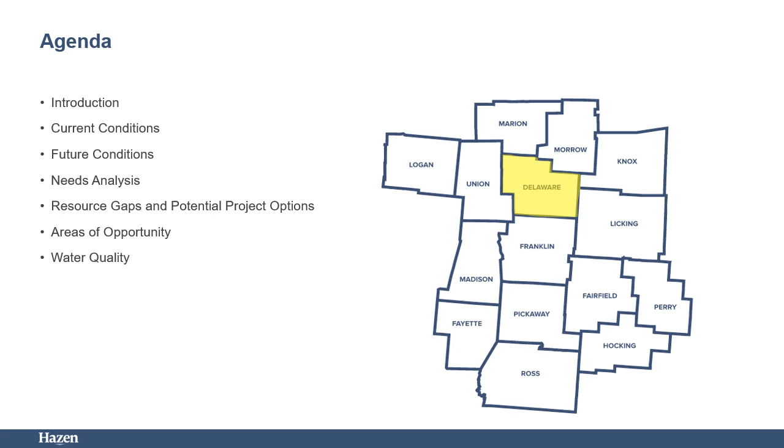And finally, water quality. We will close with a discussion of the projected changes to water quality throughout the planning horizon. Projected water quality impacts were developed based on projected changes to residential development, industrial development, and temperature and precipitation conditions. So let's begin with a high-level introduction to the study.

The Central Ohio Regional Water Study was completed for a 15-county area, as shown on the map. The overall goal was to quantify current and future water-related needs within the region and identify areas with water-related gaps and surpluses. The study evaluated water-related needs that span drinking water supply, drinking water treatment capacity, wastewater treatment capacity, receiving water capacity, and water quality for the years 2030, 2040, and 2050.

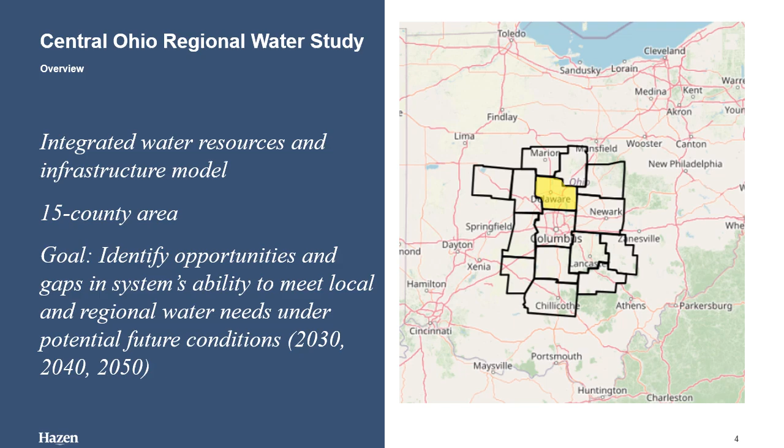Project objectives were identified for the Central Ohio Regional Water Study. The objectives include improve, maintain, and optimize resources while planning for growth. Results of the model were used to evaluate opportunities to secure safe and reliable water supply for public use, consider reuse water for non-potable needs, and identify areas of capacity limitations. Future solutions were required to maintain beneficial use of water required for recreation, wildlife, and economic growth.

Collaboration and regionalization. The project created a dashboard planning tool that will serve as a focal point for collaboration between utilities and state agencies, helping to ensure best use of both water and financial resources. Maximize funding impacts through sustainable infrastructure improvements. Using the analytic capabilities in the dashboard, state agencies can now and will in the future be able to help identify funding to build the infrastructure needed to meet the long-term needs for the region and identify future needs.

The project also provides information to the state agencies on how stormwater and surface waters will be impacted by growth and development. The project can be used to identify opportunities to help mitigate impacts of development on the environment.

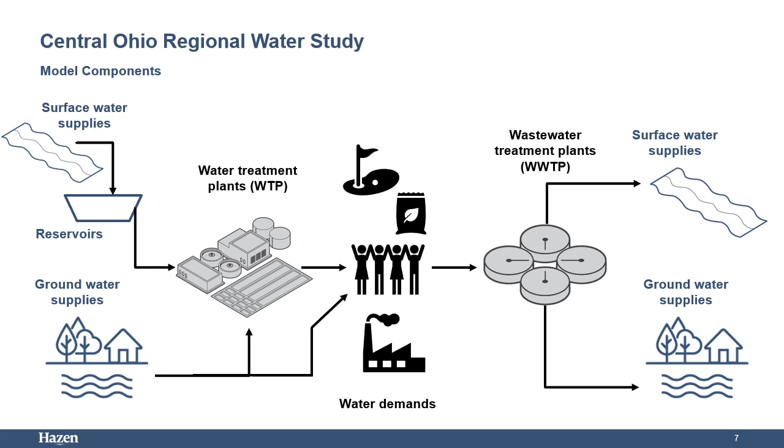Groundwater availability was estimated at the HUC 10 watershed level. To explain, HUC stands for Hydrologic Unit Code, and the 10 stands for the number of digits. The U.S. Geological Survey has delineated each of the watersheds in the country and assigned them a specific number based on their location, similar to a zip code.

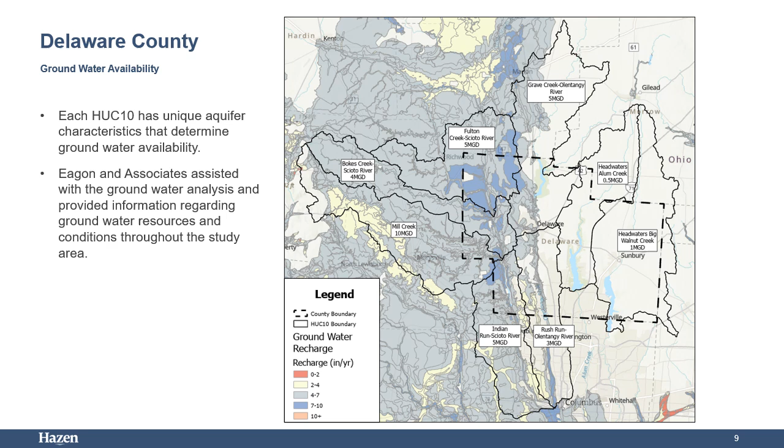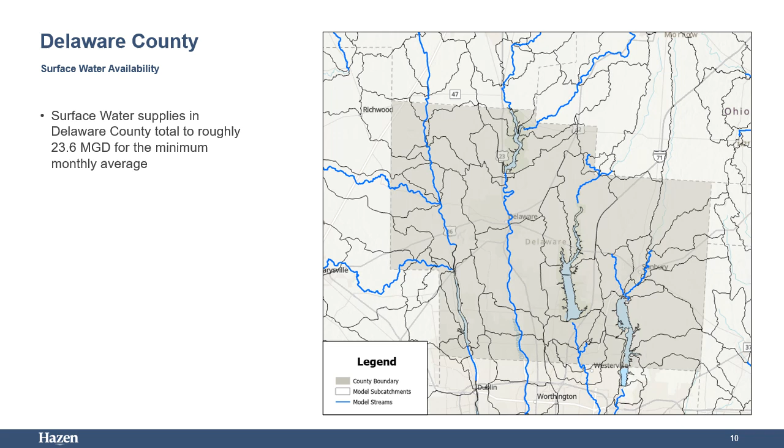Adding both the groundwater and surface water supplies together, it is estimated that Delaware County has roughly 57 million gallons per day of total available raw water supply. This supply availability is about 60% groundwater and 40% surface water. Supply availability at the sub-county level varies by location based on aquifer yields and surface water tributary area, as presented on the previous slides. The next focus for this resource evaluation was the existing and future demands that draw raw source water from the available water resources.

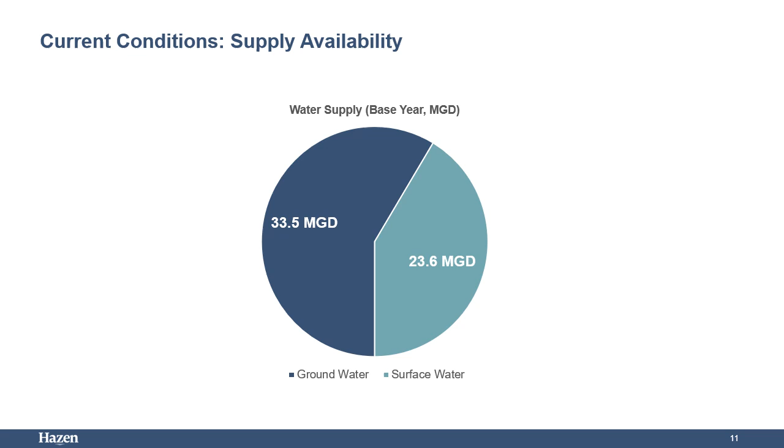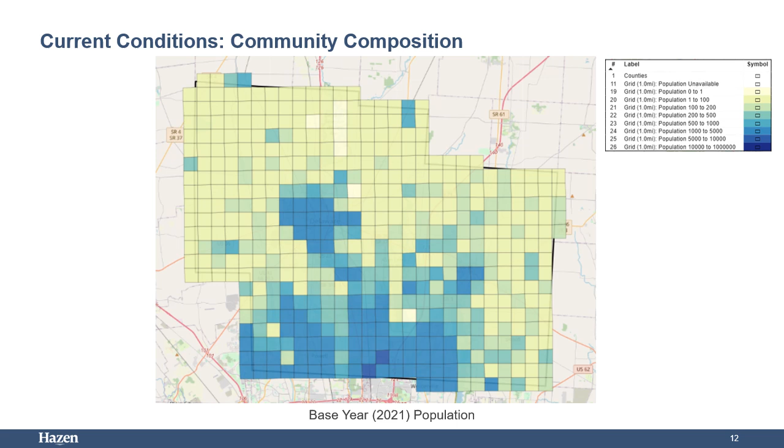A per capita water use was calculated for each service area. This was calculated by taking the water production data and dividing by the assumed population within a service area, which resulted in a per capita water use in gallons per person per day. This per capita water use includes all types of users within the service area, whether it is residential, commercial, or industrial.

It is important to note that in future conditions, no service area expansion was assumed, and the water per capita use for each utility was assumed to stay the same. This means that growth in projected population would also mean a proportional growth in commercial and industrial demand within the utility service area boundary. For future water demands, the per capita water use was multiplied by the assumed future population within a service area.

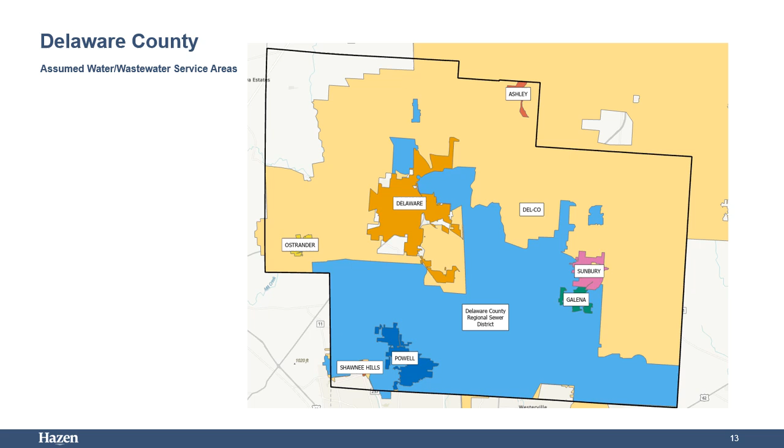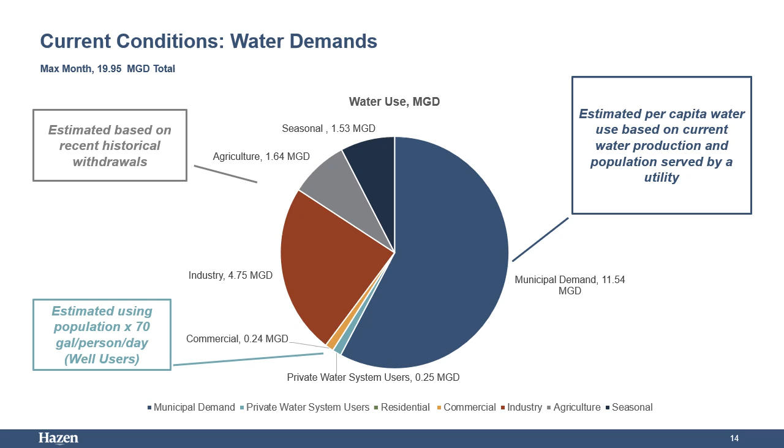The wastewater flow component in the county includes the used water from the service areas in addition to the inflow and infiltration component, or I&I, which was estimated and included in the wastewater flow. For the current condition, the maximum annual average wastewater flows are approximately 15.5 million gallons per day at the county level. The annual average wastewater flows were analyzed rather than the maximum month flows, as was done for water.

This is due to the wet weather impacts observed in the wastewater due to infiltration and inflow. During rain conditions, areas with combined sewer systems can see very high flow rates, while during dry times only the base flow is observed. High rainfall in a single month could skew the average. Therefore, an overall annual calculation is used to determine if a particular plant is nearing its permitted treatment capacity limit.

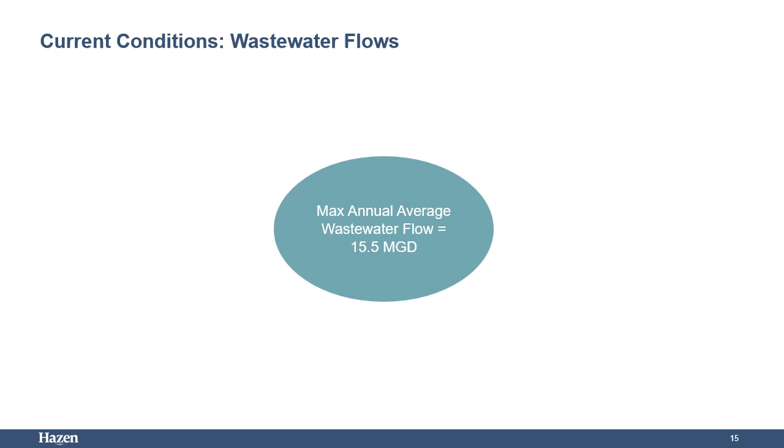The existing demands and flows can be compared to the existing infrastructure. In Delaware County, there are a number of water treatment plant facilities, and their total capacity is just over 53 million gallons per day. This includes the TES plant for Delco that is located in Knox County. Roughly 11% of that source water is pulled from groundwater, and 89% is pulled from surface water reservoirs, or the local streams and rivers. Remember that the total maximum month water demands are about 20 million gallons per day. So, in the current conditions, the county has sufficient capacity to provide treated water to meet demands.

From a wastewater treatment plant capacity standpoint, the county has just over 29 million gallons per day of permitted capacity at the existing facilities across the county. The current maximum annual average wastewater flow generated by the demand and infiltration and inflow is about 15.5 million gallons per day. Again, the existing county infrastructure is sufficient to meet the current wastewater flows.

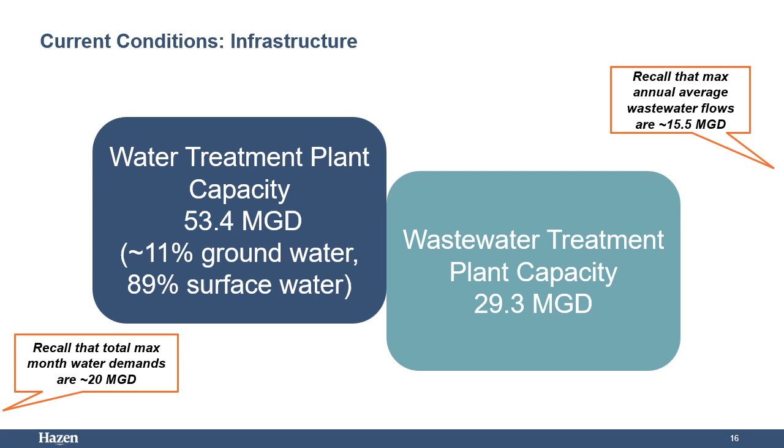With an understanding of the current conditions in the county, the next step was to expand the analysis and explore potential future conditions. This study evaluated conditions in 2030, 2040, and 2050. When analyzing future conditions, current data is projected from the present to the future in time. With that projection comes uncertainty, which is why analyzing multiple potential future scenarios can provide more resiliency and reduce the risk of failure. Scenario planning acknowledges there are several plausible future conditions that may occur and allows planning for several possible future conditions.

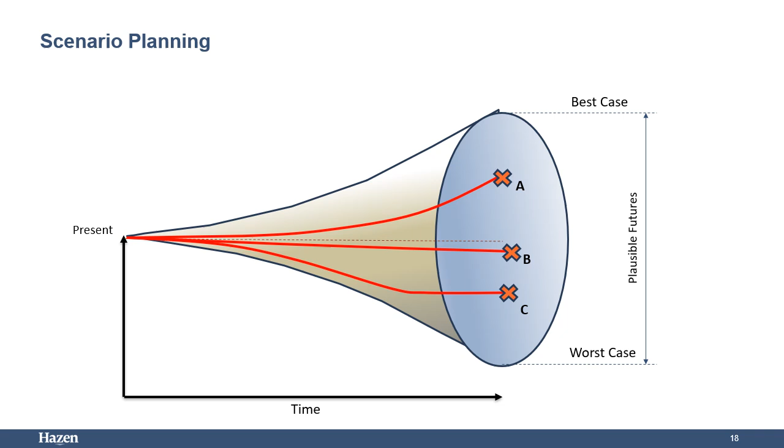4 model scenarios were developed to define the range of potential futures. Scenario conditions that were explored were 2 different precipitation and temperature changes and 2 different population estimates, totaling 4 different model scenarios. The different inputs of these scenarios will be explored further on the following slides.

2 population sources were used for the scenario modeling. The expected growth trend was informed by the Mid-Ohio Regional Planning Commission, or MORPC. The MORPC population projections were informed by local zoning and land use plans. The historical growth trend was informed by the Ohio Department of Development, or ODOD. The ODOD population projections are informed by historical birth, death, and migration trends.

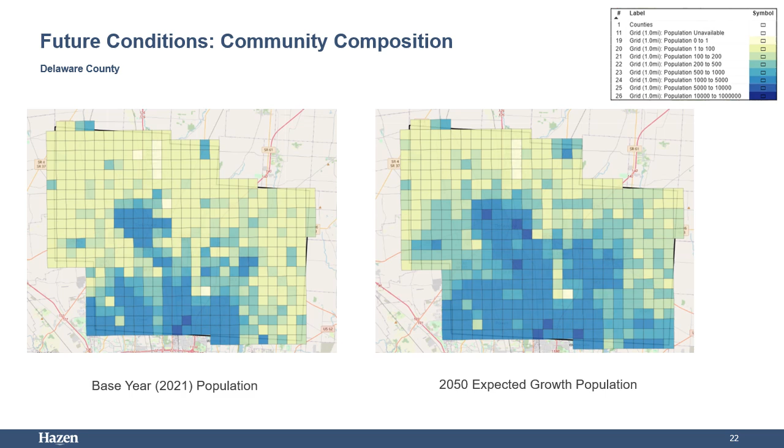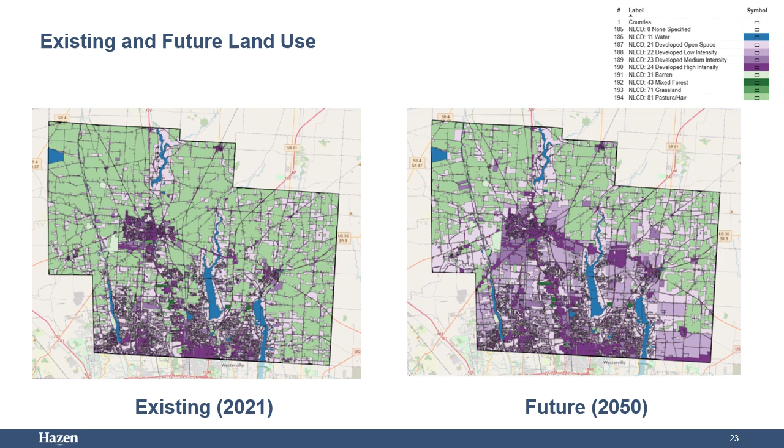Another element of the scenario modeling are the different temperature and precipitation scenarios projected. Historical precipitation and temperature data from 1983 through 2022 were used to estimate the surface water runoff and evaporation. For the future conditions, change factors were applied to the historical precipitation and temperature data to analyze the effects it may have on surface water availability. Temperature and precipitation changes were based on the global climate model data downscaled to the Central Ohio area. There are different change factors for each month and future planning year, 2030, 2040, and 2050.

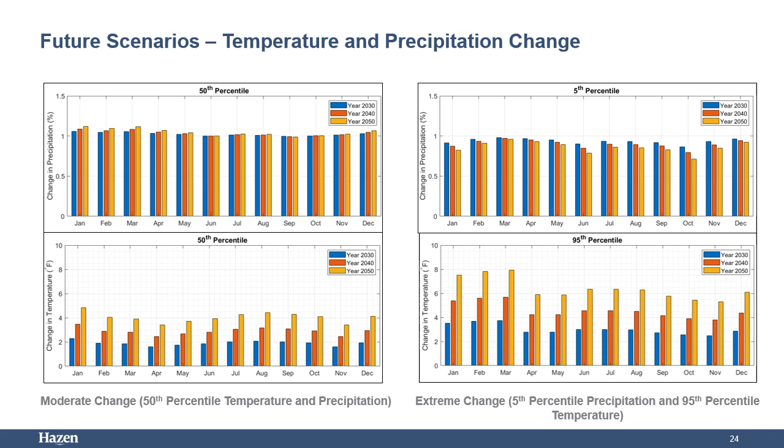The extreme change scenario that was modeled is the hot and dry scenario, which utilizes the 5th percentile change factor for precipitation and the 95th percentile change factor for temperature. The top right graph shows the 5th percentile change factors for precipitation, and the bottom right graph shows the 95th percentile change factors for temperature. A scenario with no future temperature and precipitation change factors was also evaluated. The two temperature and precipitation conditions affect the future raw water supply availability, as the two different population estimates affect the future water demands.

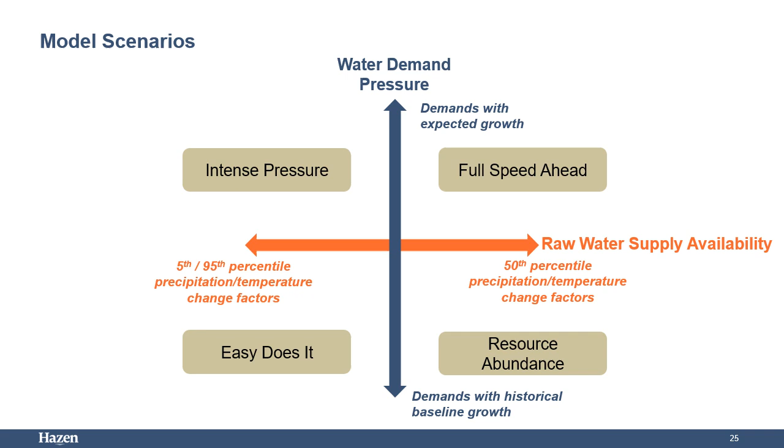These 4 scenarios allow for planning of what different supply and demand conditions may look like and how those conditions compare to the infrastructure needed. The different temperature and precipitation scenarios will impact water supply availability. In the model, the surface water supply availability was changed based on the temperature and precipitation change factors. However, groundwater availability values were unchanged based on these change factors.

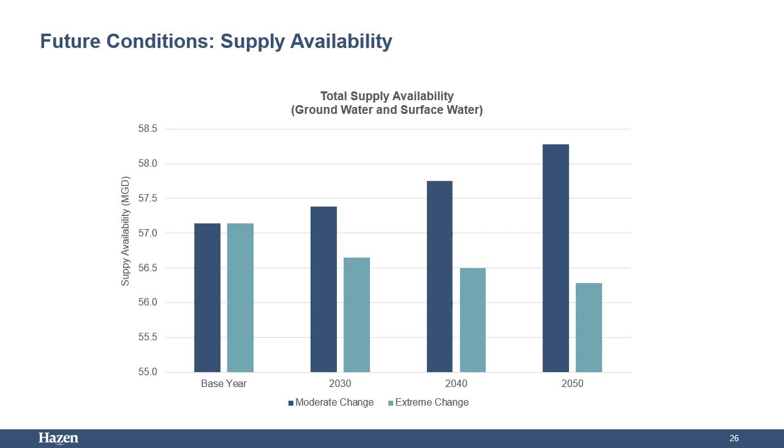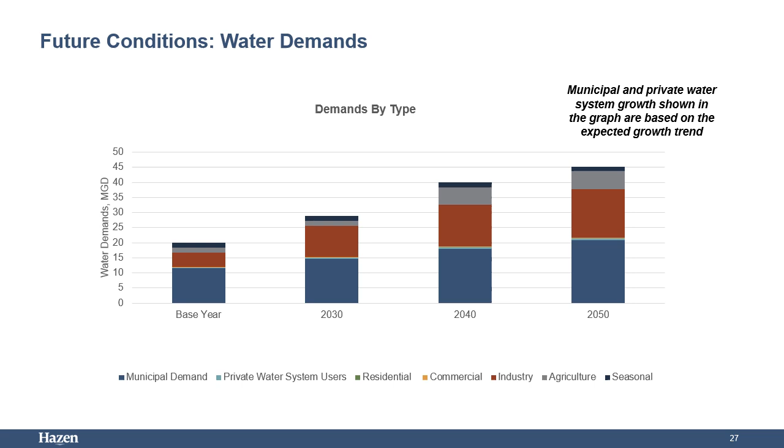The Ohio State University was consulted about assumed increases in future agricultural irrigation water demands. It is estimated that by 2040, agriculture fields will need at least 5 inches of irrigated water during the critical growing season, which occurs between July and September. Based upon this information, the team reviewed future land use to identify where agricultural fields are expected to be in 2040 and 2050, and calculated the water demand that would be needed for 5 inches of irrigation across those agricultural fields. These irrigation demands are present for the 2040 and 2050 condition and are assumed to use groundwater for source water.

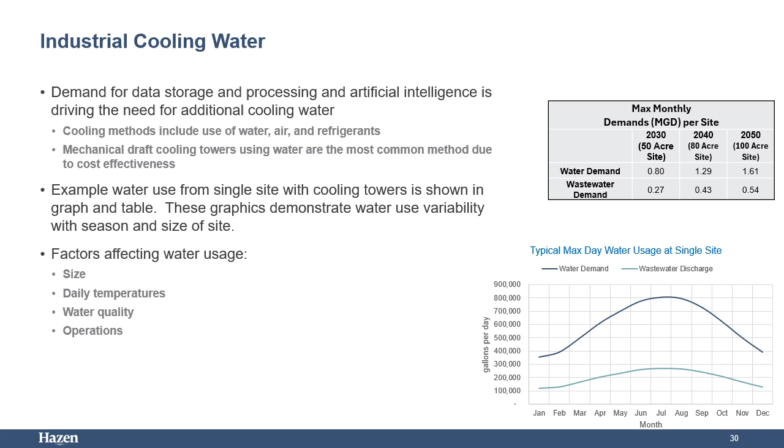Demands for industrial cooling water have increased in the area in recent years, including cooling water demands for data storage and processing centers. Industrial cooling demands have seasonal variability and need more water in the hotter months, as shown on the graph in the bottom right. These industrial sites are assumed to expand over time, increasing the water and wastewater demand for this sector. The table and graphic on the right show the assumed water use from a single site with cooling towers. Factors that affect water usage include size, daily temperatures, water quality, and operation.

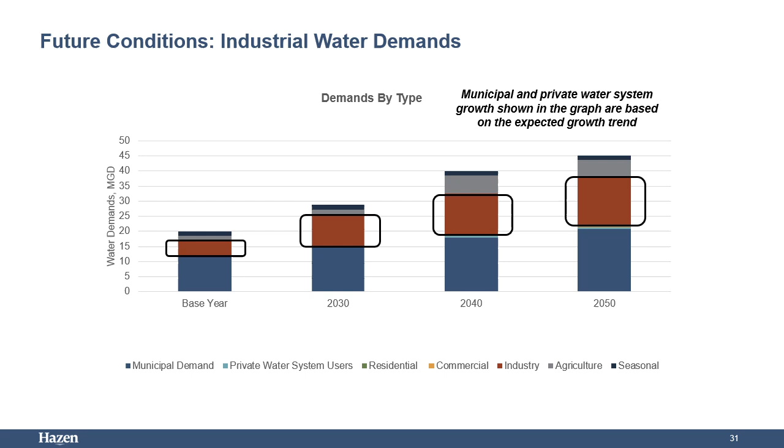Previously, the current water and wastewater capacities were explored at the county level. There are currently no future new or increased infrastructure capacities that were modeled for Delaware County. Therefore, the current water and wastewater capacities were assumed to remain constant through 2050. However, it is important to note that the City of Columbus is currently designing a new water plant to be constructed in Delaware County to primarily serve the Franklin County area. This water plant is not included in the totals and projections given on this slide.

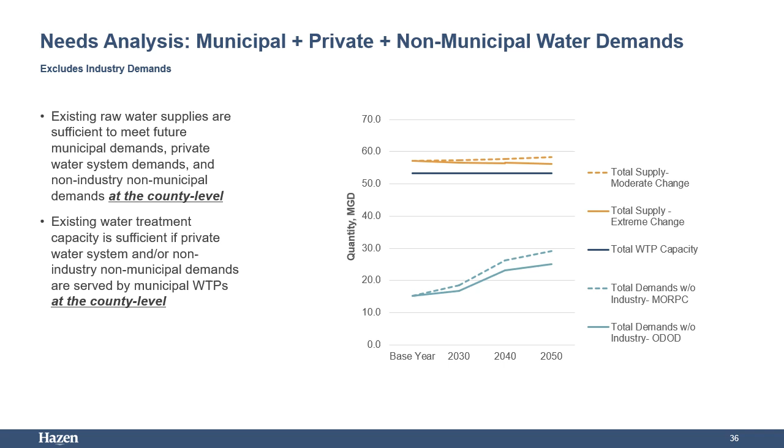Finally, when assumed industrial demands are added, the raw water supplies and water treatment capacity are still sufficient to meet the water demands at the county level, though demands start to approach the limit for water treatment plant capacity in 2050.

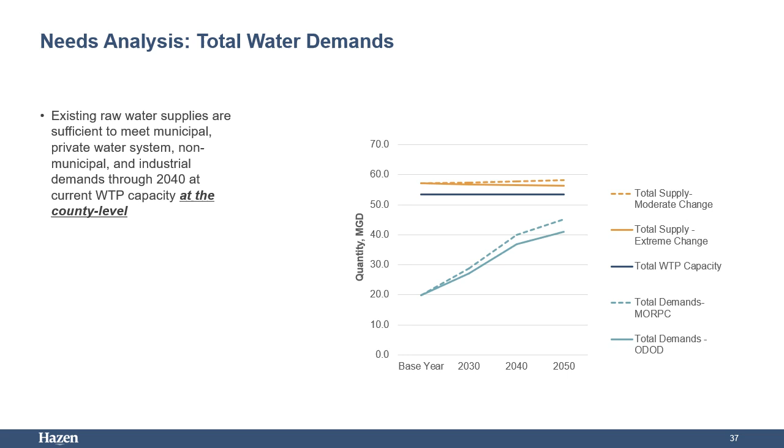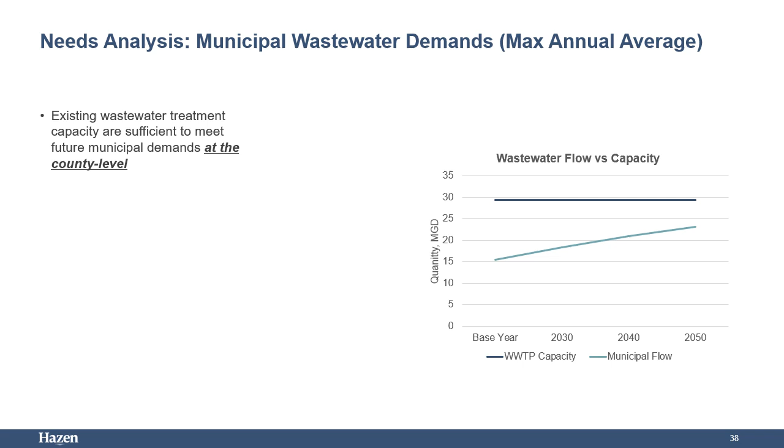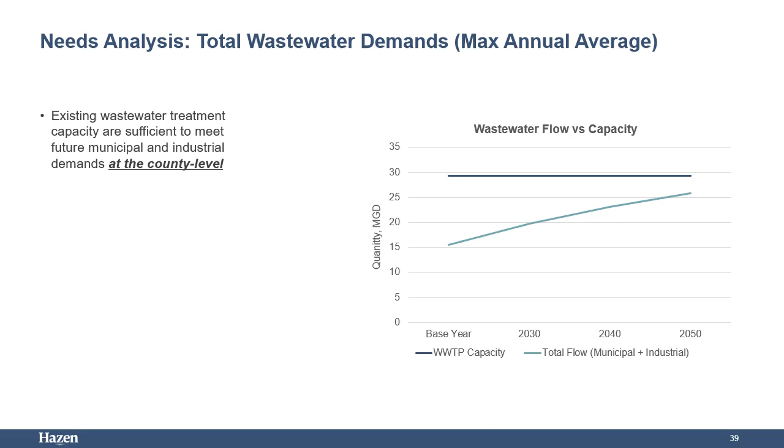The previous section evaluated supply and infrastructure availability relative to demands at the county level. This following section will address resource gaps and abundances when you consider where those supplies, infrastructure, and demands are projected to occur within the county.

For a surface water node, is any shortage observed? For a reservoir node, does the usable storage ever reach 20%? For a groundwater node, does the remaining groundwater amount ever reach 0? For a water treatment plant, is the maximum monthly average flow greater than 80% of the permitted capacity? For a wastewater treatment plant, is the maximum annual average flow greater than 100% of the permitted capacity?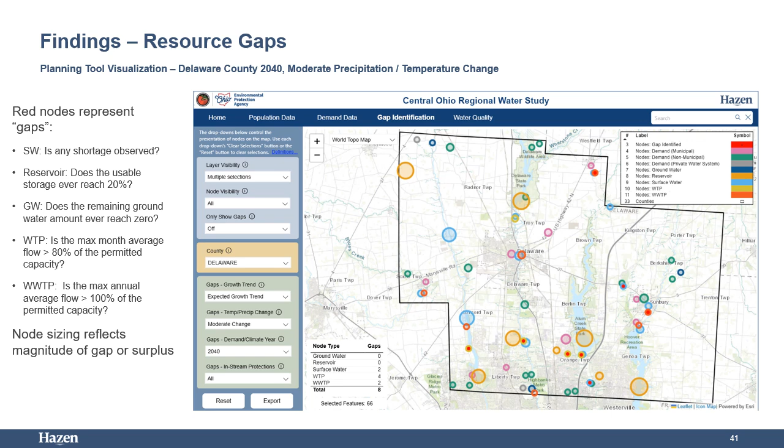This is resource gaps within the county for each scenario and model year. There are at most 12 gaps for any given year and scenario for the entire county. Most identified resource gaps in the county are infrastructure-based and not raw water supply-based. These gaps will be explored further on subsequent slides.

Findings in the subsequent slides reflect the expected growth and moderate temperature and precipitation change in 2040. The 2040 full speed ahead scenario was selected as the target planning scenario to allow stakeholders to assess the current and future project needs without extending too far into the future, while using reasonable temperature and precipitation projections.

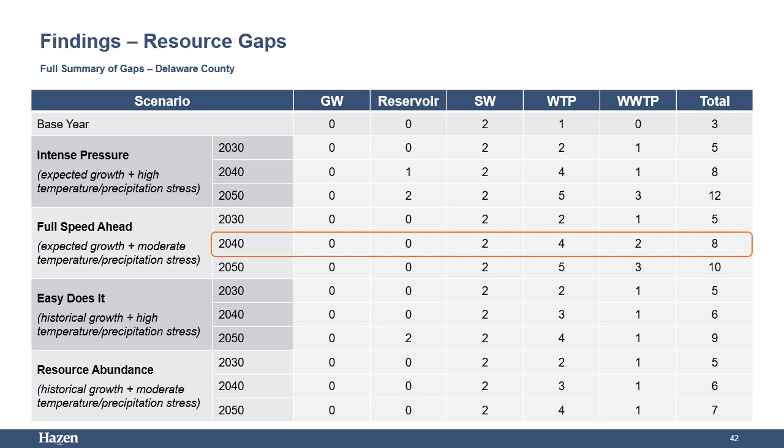The following slides will provide detailed discussion of the potential projects that could fill identified water resource and infrastructure gaps within Delaware County. The project focused on identification of opportunities and strategies to fill those resource or infrastructure gaps. Gaps can be filled through a variety of ways depending on the type of gap.

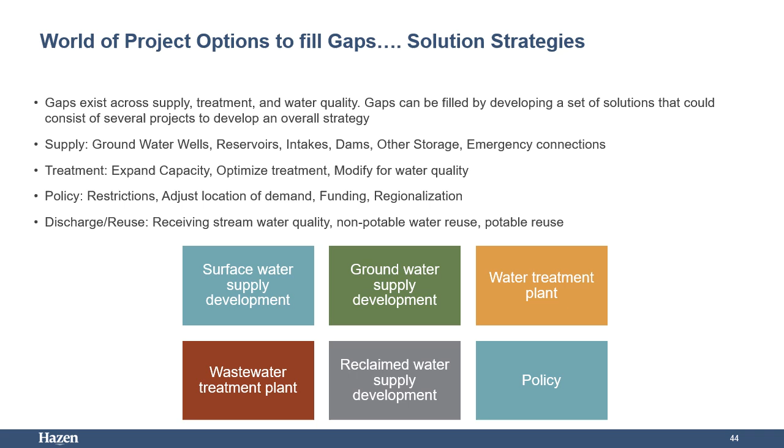For example, a supply gap could be filled by constructing a reservoir or implementing a policy to restrict use during times of low supply availability. Other solutions include expanding treatment capacity and leveraging reuse water. Gaps are often filled with a project or a set of projects.

A gap or set of gaps can be filled a variety of ways and can exist across some or all scenarios. A scenario scorecard was developed to assess the favorability of a project used to fill a gap. 5 scorecard criteria were developed to evaluate projects compared to each other as indicated on this slide. Scenario applicability assesses if that project will fill a gap across one or more scenarios. The more scenarios it addresses, the better.

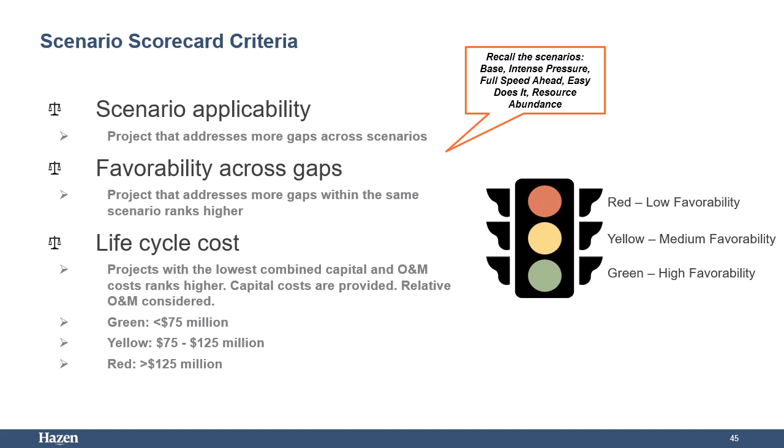Similarly, but a little different, within the same scenario, a project that fills more gaps is more favorable. Life cycle costs are another important consideration. The total life cycle costs include construction, operation and maintenance, and other projected costs. Water quality impact considers impacts associated with development, as well as changing water and wastewater use. A project that provides higher protections to water quality ranks higher.

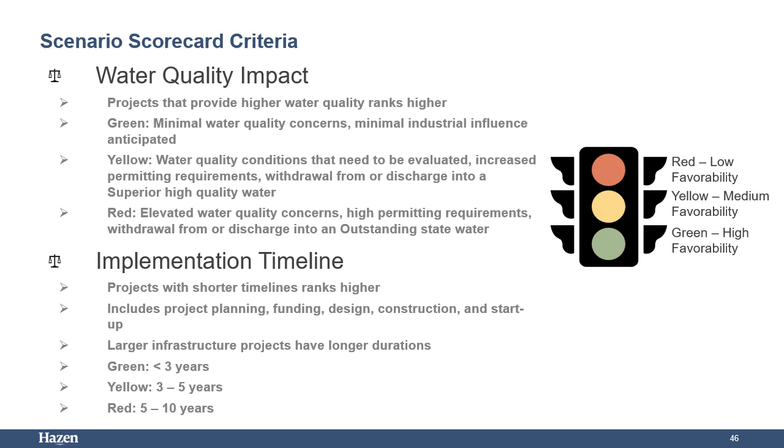Finally, a project with a shorter implementation time would be considered more favorable since the benefits of that project would be realized sooner. Strategies for the 2040 full speed ahead scenario to provide planners with near-term planning information. Note that findings of the resource gaps were previously discussed and can be further explored using the dashboard planning tool.

The infrastructure gaps, treatment gaps, and supply gaps are shown in the map graphic. Many of the gaps are relatively small, so that monitoring flows in the near term may be sufficient. Further detail on these gaps is provided in tabular format on the next slide. Pre-planning level projects are provided as examples and possible solutions to fill gaps. Additional efforts are needed to define, plan, and implement a project as outlined in the next steps.

Projects to fill gaps categorized by type. First is local, where the utility largely uses its own assets to fill a gap or an industry provides its own on-site solution. Next is regional, where a utility collaborates with other utilities. And reuse, where the utility leverages reuse water to provide non-potable water to an industrial user in order to reduce potable water demand.

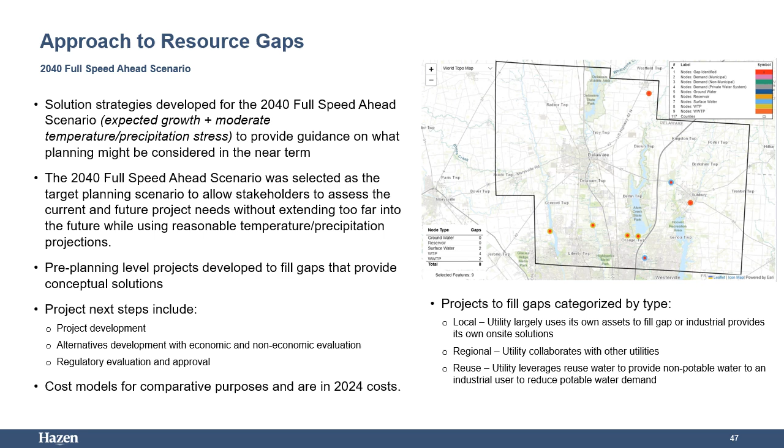This table provides detailed information on the projected resource gaps in the 2040 full speed ahead scenario in Delaware County. Sunbury and Ashley both have wastewater treatment plant infrastructure gaps. The 4 Delco plants are evaluated together and have a gap from their combined demand exceeding 80% of the combined capacity. The Home Road water treatment plant also has a gap but is evaluated with Franklin County. Source water considerations will be evaluated as well.

The Sunbury wastewater treatment plant has a 1.25 million gallon per day gap projected in 2040. Timing and right sizing of an expansion of the wastewater treatment plant should be aligned with the village's priorities. 2 project options were evaluated to address the projected gap.

Option A is an upgrade of 2 MGD to the existing treatment facility, sized to bring the 2040 flow within 80% capacity. Option B is a regional interconnection from Galena to Sunbury with the 2 MGD Sunbury plant expansion. This option should be considered if it is beneficial to take Galena offline to regionalize the area. The scenario scorecard for each project option is presented in the bottom table.

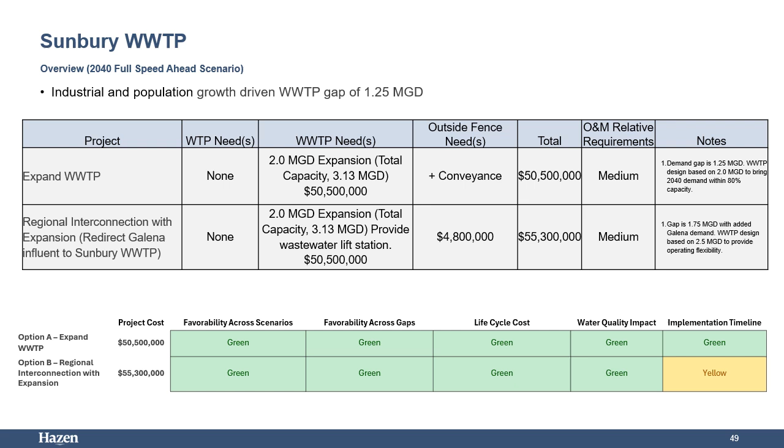The Ashley wastewater treatment plant has an identified gap as they will be at capacity in 2040. Timing and right sizing of an expansion of the wastewater treatment plant should be aligned with the village's priorities. 2 project options were evaluated to address the projected gap.

Option A is an upgrade of 0.25 MGD to the existing facility. Option B is a regional interconnection to the Upper Olentangy, which has enough excess capacity to take on Ashley's wastewater flow. The scenario scorecard for each project option is presented in the bottom table.

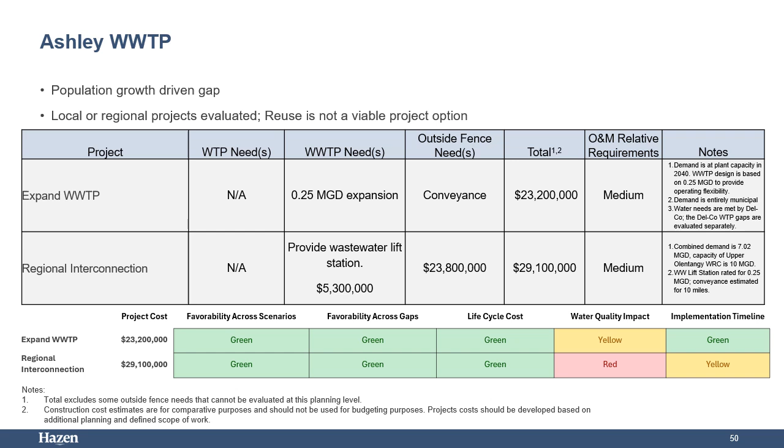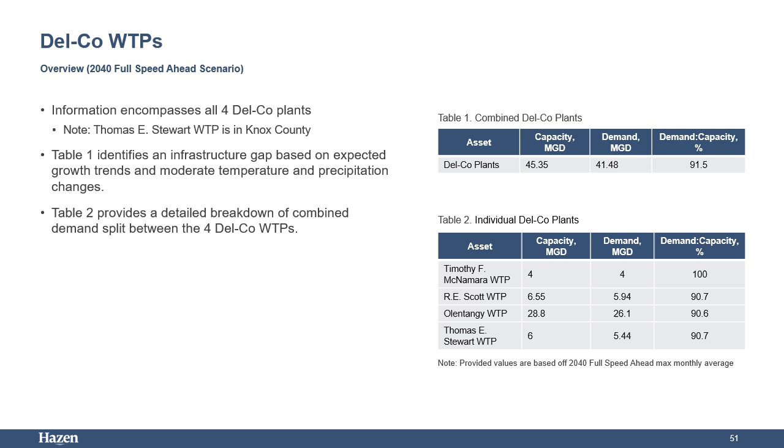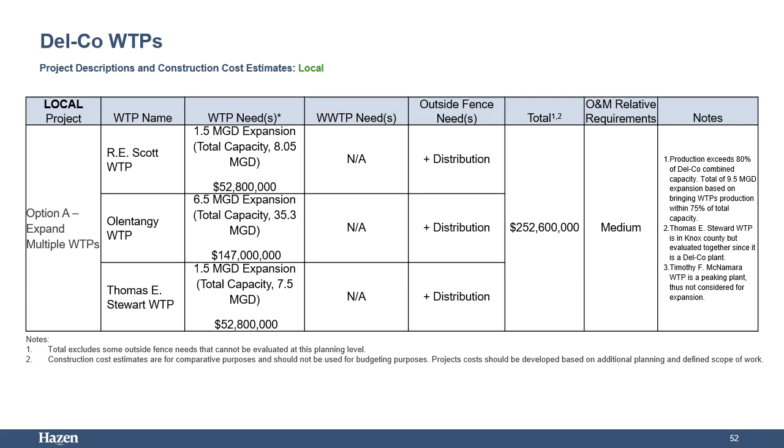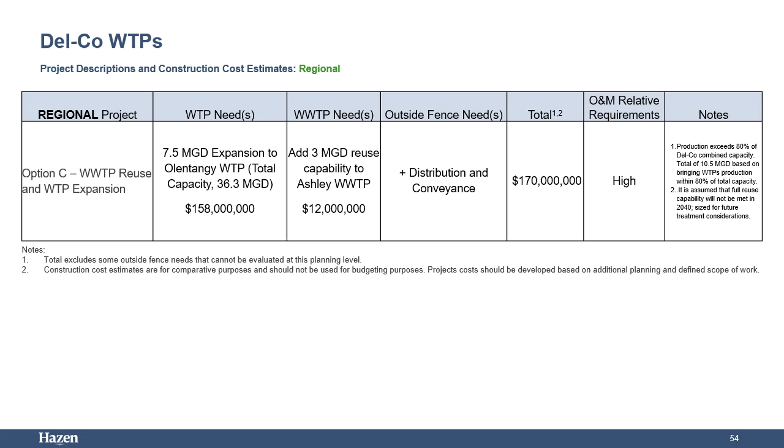Option C evaluated the addition of reuse capability to the Ashley wastewater treatment plant. Projected industrial demands can be met with non-potable reclaimed water instead of potable water. This reuse addition would allow for some of Delco's industrial demands to be met with reuse water. However, either an expansion or new facility providing an additional 7.5 million gallons per day would be necessary to address the infrastructure gap. The various options described as A through C were then evaluated using the project scorecard, with green cells indicating options with highest favorability.

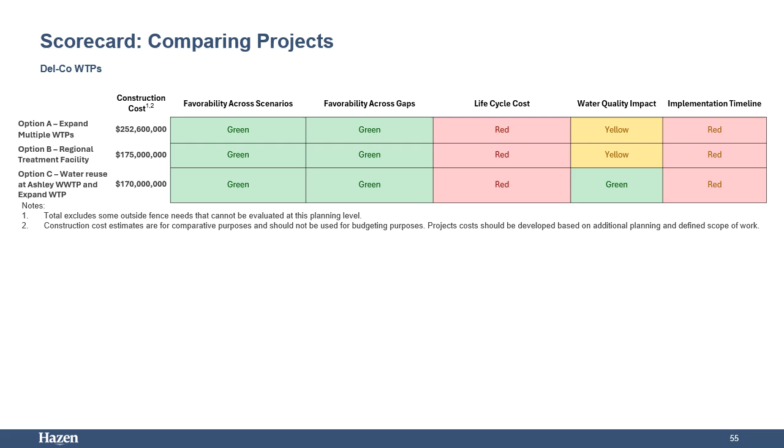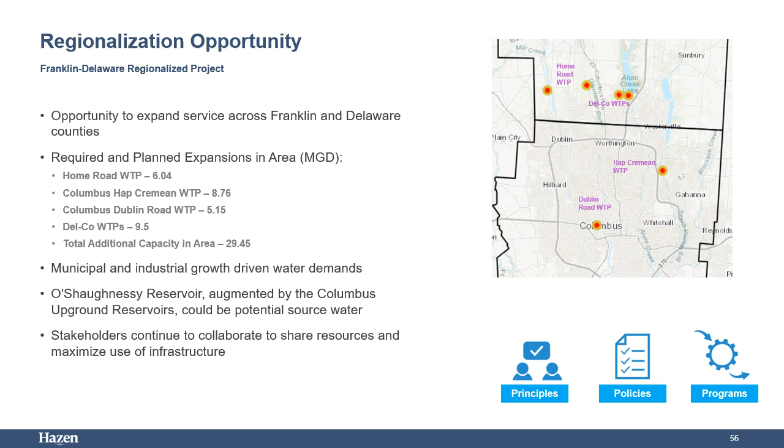A regionalized water treatment plant could be constructed to serve service areas in Franklin and Delaware County. Required and planned expansions were estimated by calculating the excess demand of 80% of each plant's capacity. Water should be available from the O'Shaughnessy Reservoir. Coordination with the City of Columbus is recommended if exploring this option. Note, this is highlighted in the Franklin County presentation as well.

This next section will present the evaluation conducted to determine areas of opportunity, which are defined as areas where there is assumed modeled surplus capacity. It should be noted that this section only identifies potential areas for opportunity. Project planning and utilization of surplus capacities will require further evaluation and discussions with local municipalities and stakeholders. First, water supply areas of opportunity will be discussed.

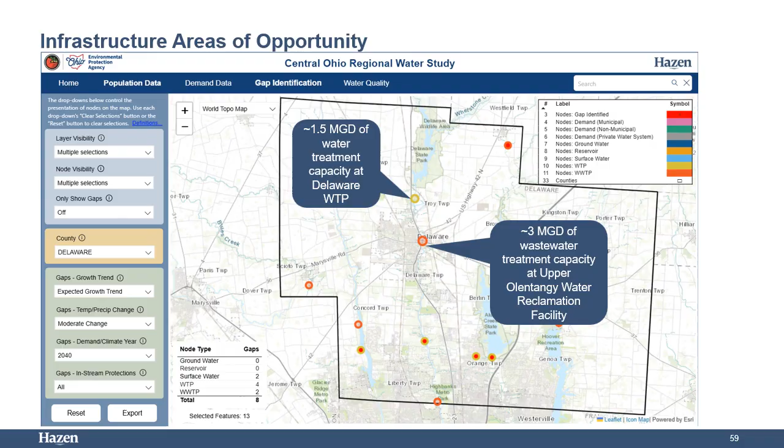This next section will present the project findings relative to projected water quality across the planning horizon. While the Central Ohio Regional Water Study was primarily focused on water supply and treatment capacity, the models developed were also used to project potential impacts to water quality that may occur due to the changes in population, land use, infrastructure, and future temperature and precipitation changes.

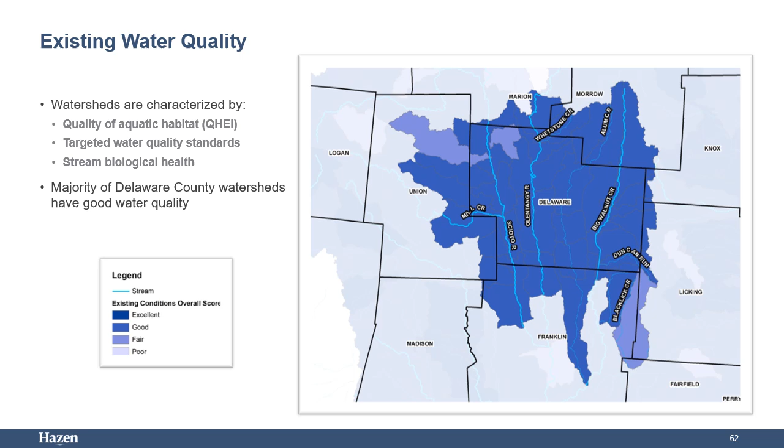4 factors were used to determine the potential for future impacts to water quality. The first was land use. The population and land use projections provided by MORPC were used to estimate the overall change in the percent impervious of the watershed as estimated to occur by 2030, 2040, and 2050. Literature data has shown that increased impervious area in a watershed is typically correlated with decreasing water quality. As impervious area increases, the overall stream water quality tends to decrease.

Second is hydromodification. When streams see higher flows and/or more frequently occurring storm events, stream banks may experience increased erosion. With these flow changes, streams may become incised and disconnected from floodplains, resulting in a decrease in water quality and increase in suspended solids.

Next, increased occurrence of low flows. During dry weather conditions, healthy streams may typically maintain base flows to support aquatic life. If the low flow periods are extended or flows are projected to be lower under future conditions, it could have a negative impact on water quality due to loss of aquatic habitat and could therefore lead to more restrictive permitting requirements.

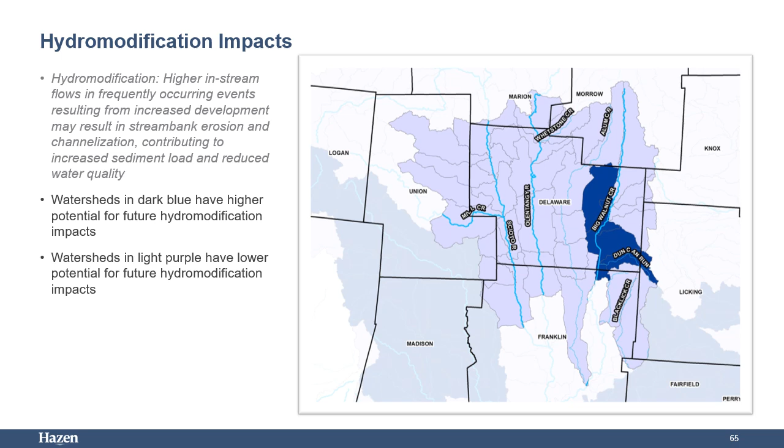Watersheds in dark blue have higher potential for future hydromodification impacts based on the regional watershed model. For watersheds with a downstream modeled link, any of the watersheds that saw a 10% or higher increase in projected flows during frequently occurring storm events were designated as having a higher potential for hydromodification to occur. The watersheds with a lower potential may still experience hydromodification in isolated instances, but changes are not projected to be as significant given the range of forecasted scenarios.

Increased occurrence of low flows. During dry weather conditions, healthy streams may typically maintain base flows to support aquatic life. If these low flow periods are extended or flows are projected to be even lower, it may have a negative impact on water quality and lead to more restrictive permitting requirements. The stream model was used to simulate stream flow from runoff as well as from wastewater treatment plant infrastructure.

Future scenarios were developed that examined the impact of changes in population, land use, and temperature and precipitation on projected flows. 40 years of simulated stream flow was analyzed to determine the impact of different scenarios on projected flows. Flows from the model were examined, and an evaluation of flows during the driest periods was conducted to determine which watersheds may have a higher potential for water quality impacts due to decreased base flows during drier periods.

Watersheds in dark blue have higher potential for future water quality impacts and more restrictive permitting requirements related to increased occurrence of low flows. For watersheds with a downstream modeled link, any of the watersheds that saw a 10% or greater decrease in projected flows during low flows were designated as having a higher potential for water quality impacts.

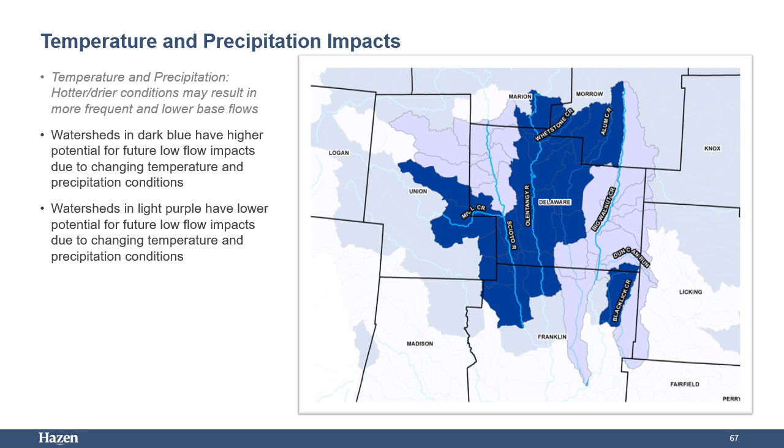The Central Ohio Regional Water Study Dashboard can be utilized to examine individual watershed characteristics and identify watersheds with excellent water quality and high potential for future impacts. Those watersheds can be considered and prioritized for protection, conservation, and restoration activities. Several potential mechanisms are available for water quality protection.

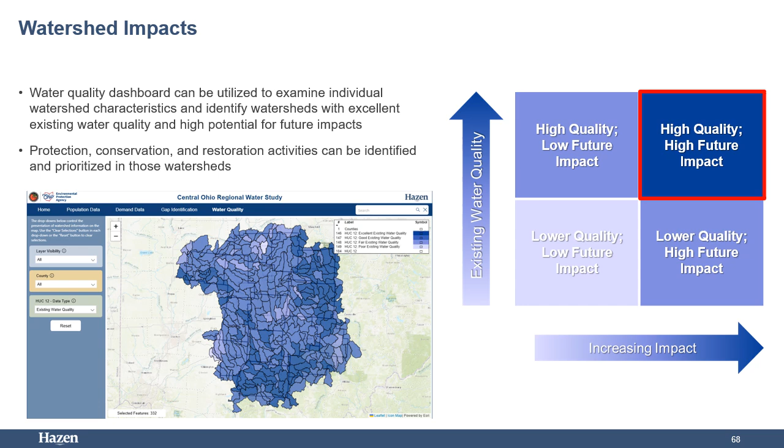With potential water quality impacts identified, considering water quality protection is the next step. Water quality protection is a critical part of any water resource plan. It is important to understand that streams are constantly changing due to a number of factors, including vegetative communities, adjacent land uses, and changing temperature and precipitation. The magnitude of change over the next few decades will vary across the region and is subject to several variables.

Current development plans indicate that development pressure is being increased in areas that are rapidly developed. Proper protections should be in place prior to development and significant land use changes in order to protect local water quality while supporting economic development. Proactive watershed engagement may reduce or eliminate negative impacts of development on water quality. Four categories of solutions should be considered, including policy, partnerships, data, and funding that could be used to help offset or mitigate any potential future water quality impacts.

Based on the findings of this study, there are some key locations that would benefit from prioritized protections. While all protective measures should be initiated across the region, immediate focus should be directed to protecting the high water quality watersheds with a high potential for future impacts.

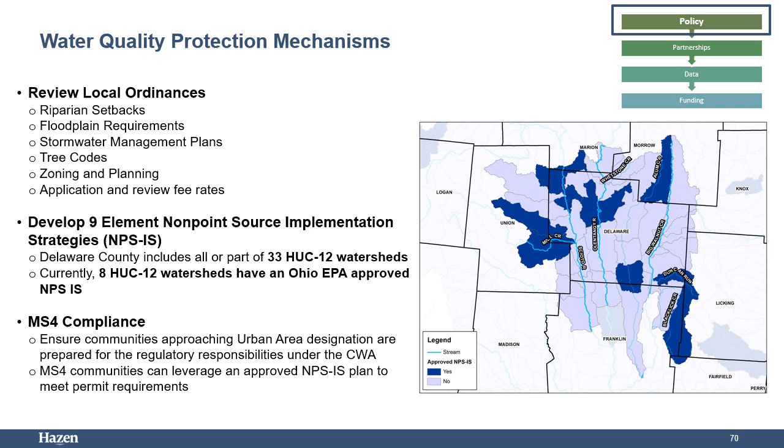MS4 communities can leverage a NPSIS plan to meet permit requirements by identifying watershed-specific strategies and projects that improve water quality. By integrating data collection efforts from NPSIS plans into MS4 compliance activities, municipalities can improve regulatory efficiency, strengthen funding opportunities, and enhance water quality improvements.

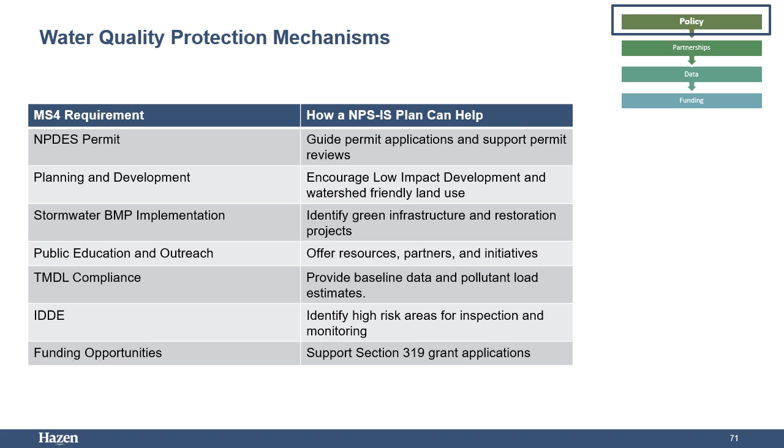Strengthen partnerships between municipalities, watershed organizations, and other local governmental agencies. Communities don't need to work alone. Planning efforts are typically developed with input from state and local agencies, watershed groups and nonprofits, soil and water conservation districts, and universities and research institutions.

By coordinating efforts with these stakeholders, communities can collaborate, get together and coordinate current issues and upcoming plans. Meet regularly to discuss trends, projects, and upcoming plans. This can be outlined in stormwater master plans and can be expanded upon to involve additional stakeholders to discuss overall watershed action items. Invite guest speakers to learn about new opportunities. Representatives from existing partnerships or outside agencies can share success stories, lessons learned, and upcoming opportunities for projects and funding.

Collaborate data collection and permit review responsibilities. Ensure responsibilities are delegated appropriately and that all partners have the resources they need to carry out said responsibilities. Link data between agencies through GIS. Pull the data collected and create a GIS database that is linked. This allows for partners to readily use data that is already available.

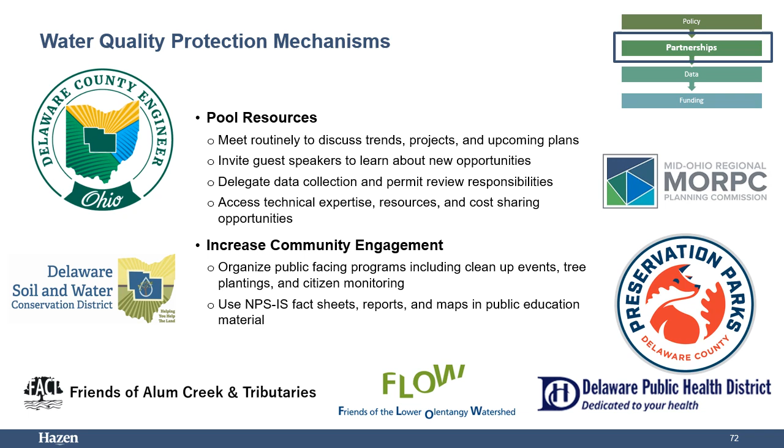Utilize NPSIS plans to identify partners and outreach resources. Host a platform to collect public observations and concerns. This is useful for monitoring spatial changes over time, as well as identifying key areas of concern for community members. Monitor water quality. Bolster local data collection efforts through training and certification programs. Monitor development impacts. Implement long-term monitoring programs to assess the cumulative impacts of population growth and development on water resources.

Educating communities about the importance of water conservation and pollution prevention can encourage responsible behavior, and involving communities in data collection is a great way to encourage grassroots efforts to take place. Use monitoring data to inform revisions to watershed management plans and policies, ensuring they reflect current and future challenges posed by population growth.

Digitize records. Encourage the use of GIS viewers to store available data collected by various governmental and public entities. Digitize existing record drawings and georeference new development records as they are constructed. Ensure data is collected equitably across the county, focusing on watersheds with high quality features and those experiencing ongoing issues, or areas adjacent to and notably downstream of new development.

Public reporting. Collect observations of flooding, erosion, and general water quality and store records digitally for analysis and reference. This will help identify areas of concern that are being felt by the community. Share monitoring results with the public and stakeholders to increase transparency and accountability.

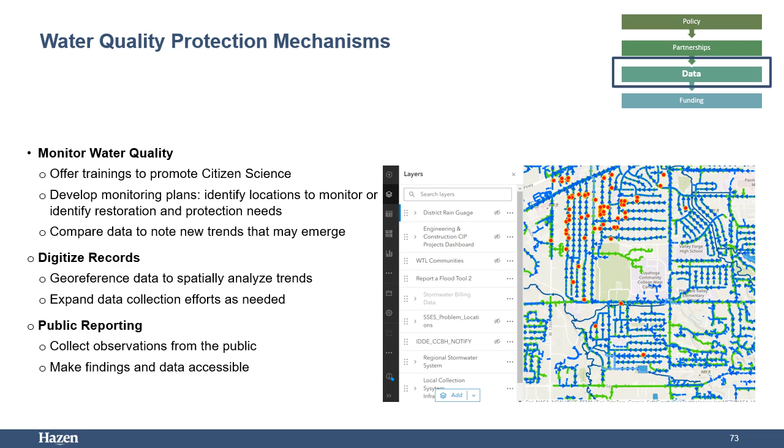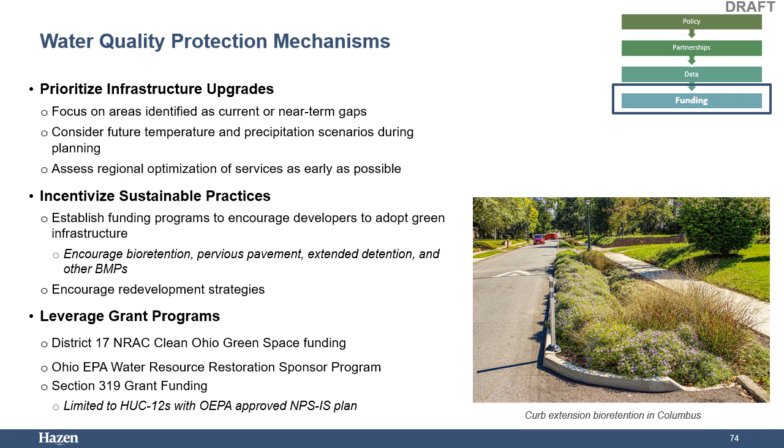Section 319 grant funding. There are 8 HUC 12 watersheds with approved NPSIS plans in place for Delaware County that would be available for Section 319 grant funding. H2 Ohio provides funding through H2 Ohio Rivers and H2 Ohio Wetlands. The Rivers program has several grant funding opportunities. Those that are applicable are listed, as well as the coordinating state agency.

Agricultural Incentive Program. In 2024, Governor DeWine announced a statewide expansion of H2Ohio producer initiatives, making the initiative available for the first time to producers who farm outside of the western Lake Erie Basin. For the first round of statewide enrollment, ODA offered enough funding and resources to enroll a new 500,000 acres outside of the western Lake Erie Basin. More than 525 producers in 51 additional counties enrolled in 2024.

The program incentivizes farmers to implement science-based, proven best management practices to prevent nutrient runoff and improve water quality. ODA works closely with county soil and water conservation districts to administer participant contracts, provide technical assistance, and support producers.

The U.S. Department of Agriculture and the state of Ohio are partners in implementing a voluntary Conservation Reserve Enhancement Program, CREP program, to enroll up to 67,000 acres of agricultural land in the Lake Erie watershed and to enroll up to 70,000 acres of agricultural land in the Scioto River watersheds within the state of Ohio.